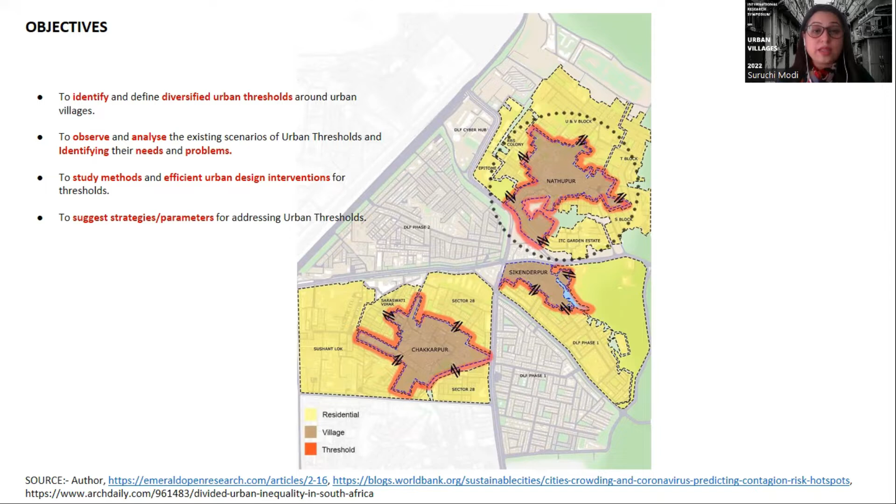Therefore, the research began with a set of objectives: to identify and define diverse urban thresholds around the villages, to observe and analyze the existing scenarios of these thresholds and identifying their needs and problems, to study methods and efficient urban design interventions for these thresholds, and to therefore suggest strategies for addressing them.

The paper analyzes the construct of urban villages as opposed to the city growing around it. Villages in Delhi NCR like Nathupur, Chora Sadatpur, and others are the cases in consideration. It traces their evolution from inception to the present coexistence with the urban fabric around it and explains factors responsible for its unique development trajectory.

Their threshold spaces are considered as opportunities of intervention, hence they're examined in further detail, and solutions based out of integrated governance, spatial integration, and environmental sustainability are considered, again, stemming out of the local community-based needs and aspirations like having schools, sports facilities, public libraries, planned open spaces for cultural and everyday activities, amongst others.

These form the program brief, helping in a smooth transition of the urban villages from being enclaves to integrated nodes within the city. Therefore, having studied threshold spaces, the research began with classifying them in the following manner.

The first one being open spaces, which are made up of parks, squares, waterfronts, green belts, roads, and streets, where people could use these areas to exchange information, strengthen interpersonal ties, and lead to environmental and social cohesion.

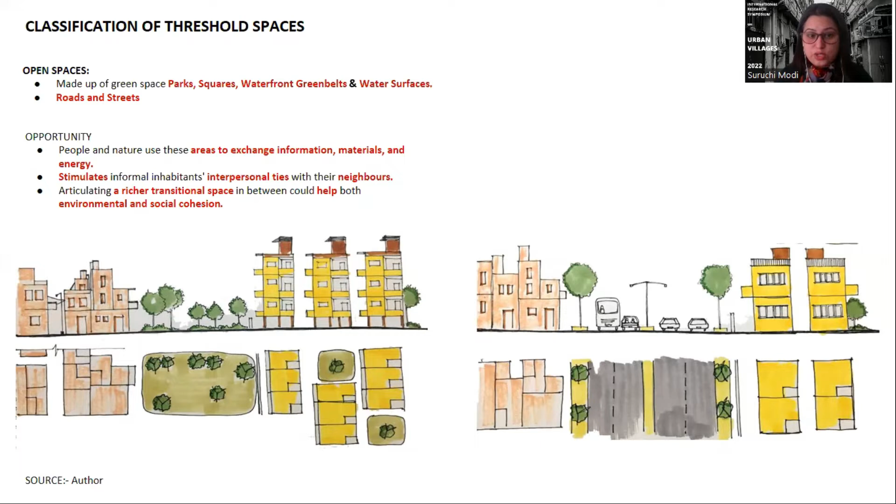As voids or extra spaces in the center of the informal settlement and the structures surrounding it, which are primarily being used for waste disposal, resulting in antisocial behavior. And then the overall morphology altogether, where the relationships between spatial structures, functional constellations, access networks, and emergent urbanity is seen at various scales.

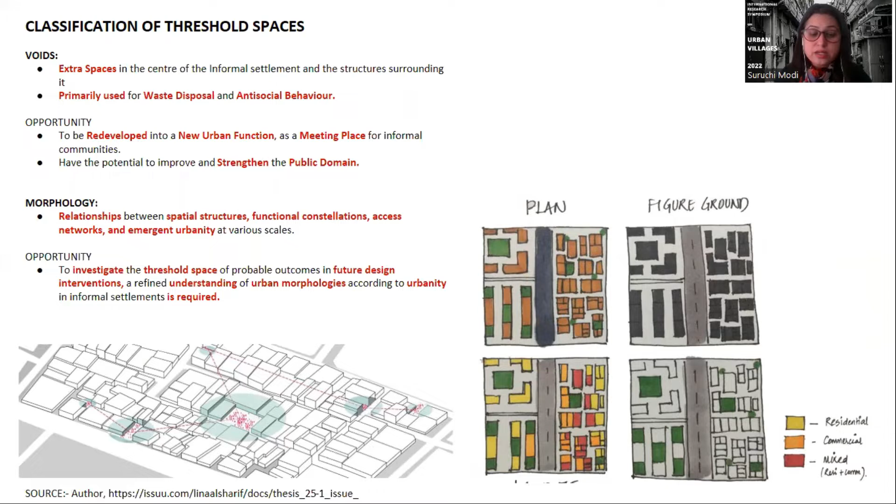Now, taking a deeper look into these through the cases we studied, I would like to pass on the presentation to Anson.

Thank you, Suruchi ma'am. Coming up to our case studies. Our first case study is of Lado Sarai, a project done by DUAC. The space was getting highly congested due to increase in population and being secluded from its precinct and from the city.

Key elements from the case studies that we could gather were they strengthened the structural network of the village and tried to create a segregation between vehicular and pedestrian movement for a smooth and safe mobility network of the village with its precinct, so that they could be a through and through connection of the village.

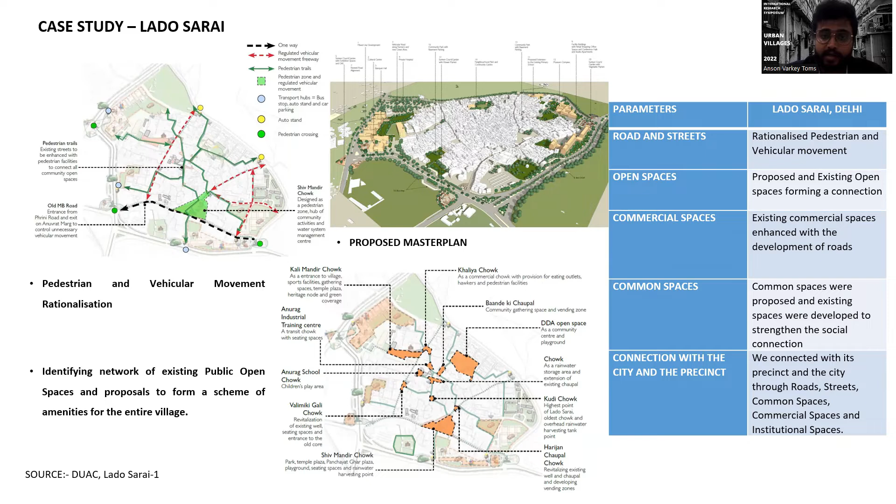They proposed activities and commercial buildings which are highly interdependent and public in nature, such as museums, parks, markets, and hospitals. Coming to our next case study is of Parque Royal, Rio de Janeiro.

So the place was near a water body and it was highly unsafe, unhygienic for people around it due to the detachment, and also the unattended public spaces inside the villages.

Key elements from these case studies were they developed a network system in such a manner that people could easily move inside the village and enjoy the water body, the edge of the water body.

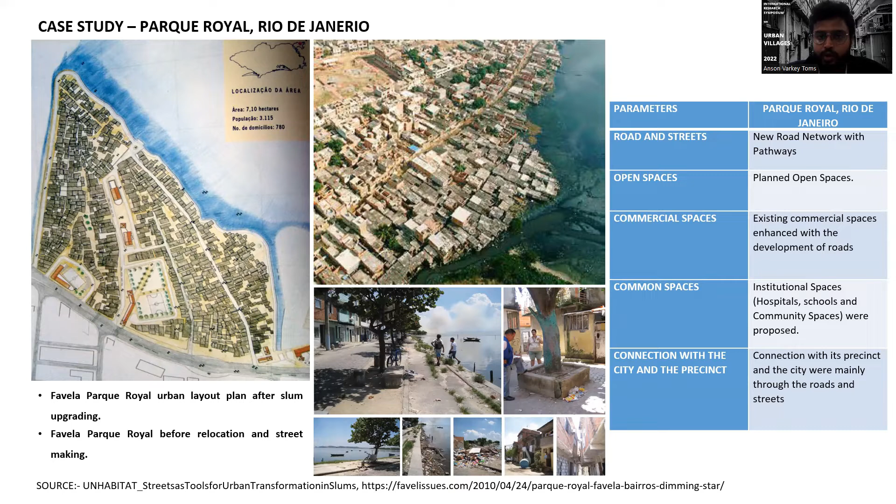They tried to redesign the existing social spaces, which had a great potential, so that people could actually experience a good, lively experience through the village till the water body.

Our third case study is of Medellin, Colombia. In this case, the village was segregated and secluded from the city in such a manner that it took a lot of time from village to reach the city and vice versa, even though they were highly interdependent on each other.

So they tried to create a network, develop the existing spine of the village and expand it, and propose activities which would generate and increase the local economy of the village, as well as create a smooth connection between the city and the village, allowing an easy interdependent nature throughout the city.

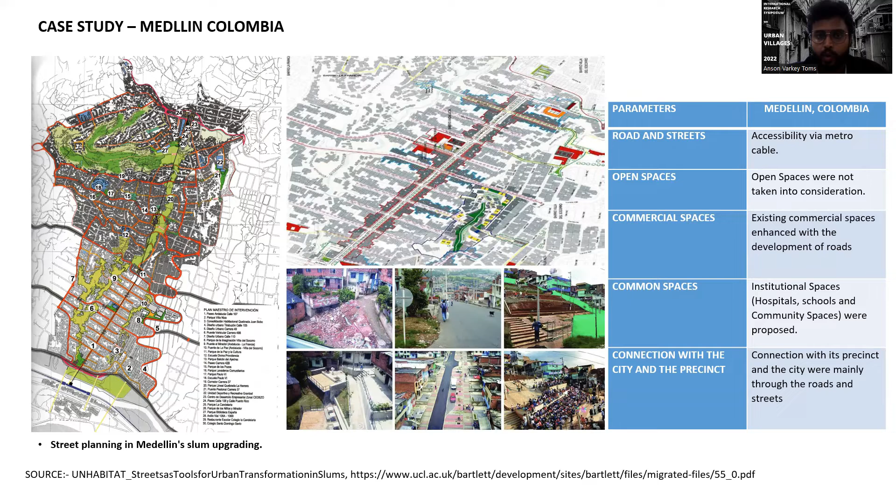So coming to the inferences and conclusions from our paper. Currently these threshold spaces act as a barrier or boundary in the current city's planning system. The potential is high for these threshold spaces, which can generate innovative, socially sensitive, and adaptable solutions. These are currently untapped. Urban development programs should focus on these threshold links.

Isolation from the city's network is one of the major reasons these urban villages don't get recognized, and they slowly get secluded from the city's development. So the potential development is by creating an intervention in the threshold.

First, the development of thresholds tends to tie the urban village with its precinct. Opening of roads and incorporating public spaces would upgrade and provide an interdependent environment, creating a circle so interrelated with each other, blending the space with a smooth transition from one space to another.

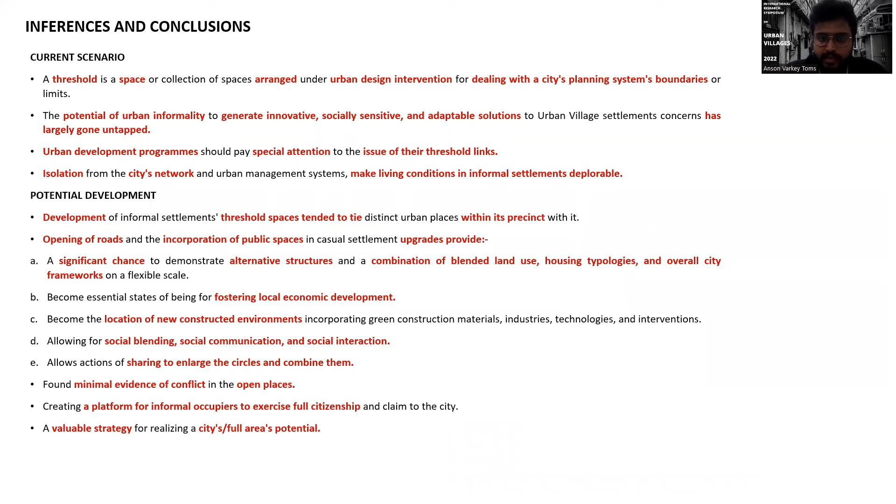Right now, the development that happens is around the village, and the village gets secluded. The activities inside and outside the village are not interrelated. By creating the threshold space in such a manner, we would enable the village to get connected with its surroundings.

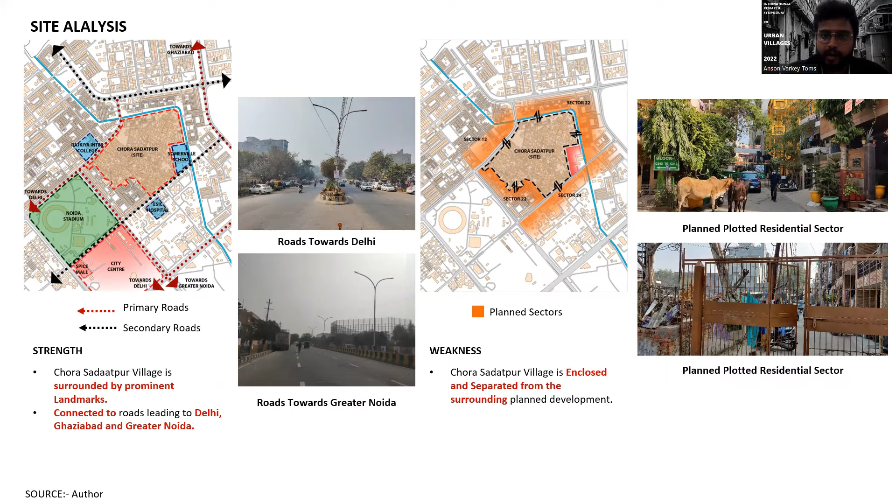All the development throughout the years happened, but the village, which was the initial part of all the development, remained untouched. Although it had many opportunities, such as two major edges - the institutional edge and the commercial edge - with the internal spine highly commercial in nature. On the fourth edge, we could see a space which can be converted with great potential.

Right now, it is the Nala, which is creating unhygienic conditions, and all the spaces inside the villages, the voids, are used as dump yards, creating unsafe conditions and promoting illegal activities in these spaces.

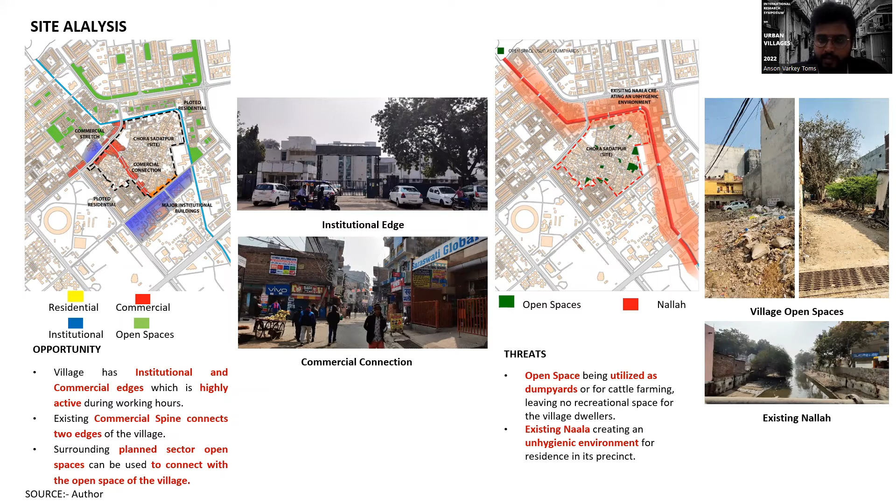With this in mind, our vision was developed to create an interdependent environment of the village and its precinct, for synchronized development of the area. For this, we focused on four objectives: connecting the village structurally, socially, recreationally, and through comprehensive development - all in all, comprehensive connection of the village with its precinct and then with the city.

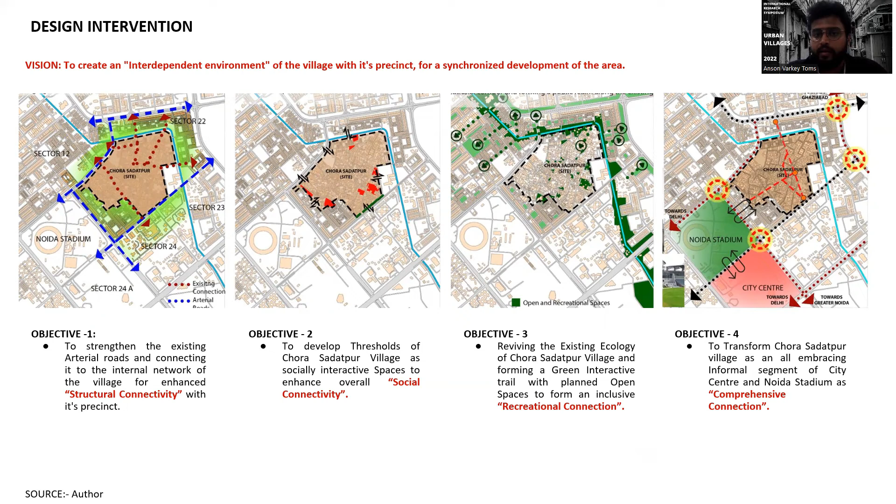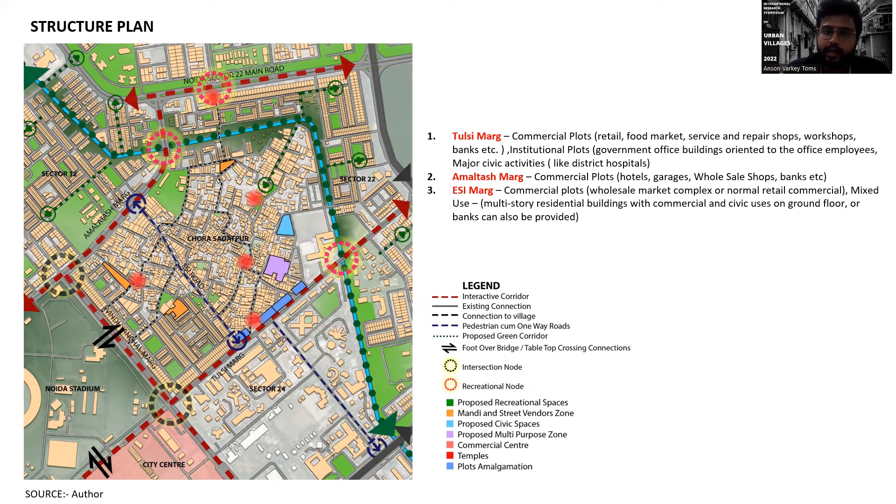For this, we created a structural plan in which we focused on the nodes to create a recreational space, giving a smooth transition from planned spaces to unplanned spaces, and tried to provide social activities in such a manner that people are not only focused on the threshold but also interact with the village in a smooth nature.

As you can see in the master plan, we've proposed activities and developed the edges of the villages in such a manner that people are highly motivated to interact with the village or move around it, and the village does not get secluded from the surrounding development. People get recognized.

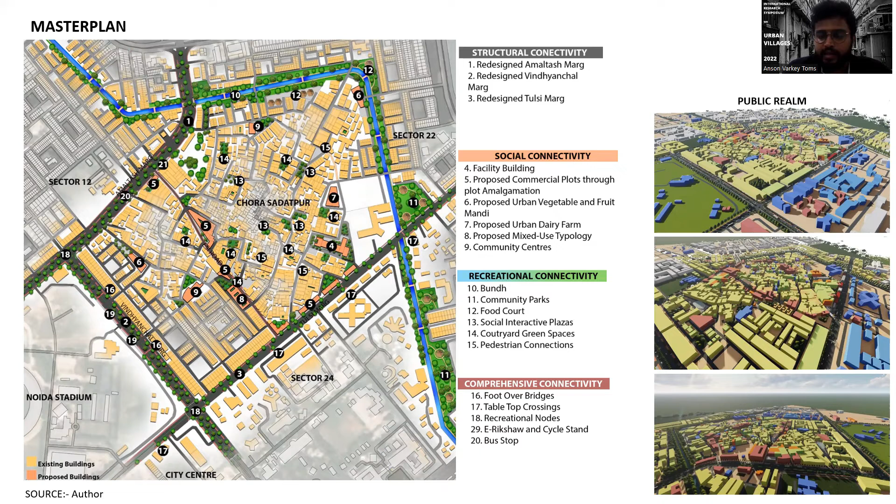It gets revived. Coming to the details, one stretch of the village was highly commercial in nature, so we kept it commercial but gave space for street vendors, so there's an increase in growth in the local economy.

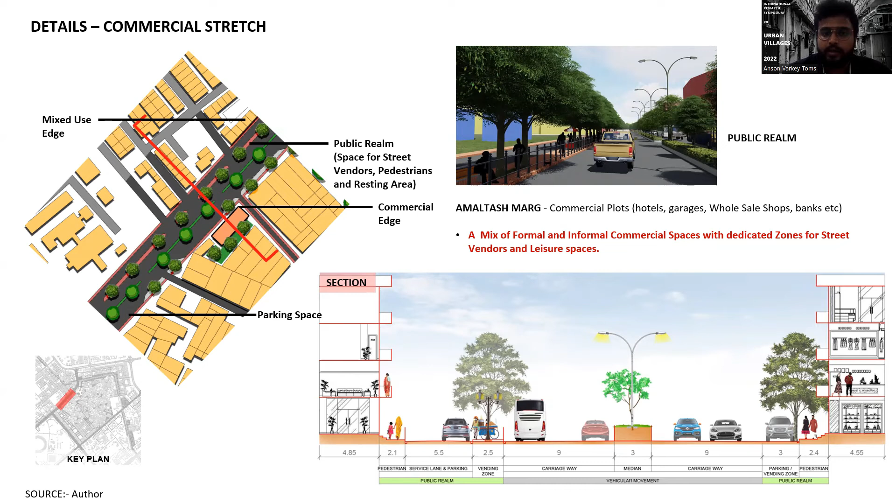Coming to the second edge of the village, which was institutional-cum-commercial, we provided food courts, food joints, and amalgamated plots into bigger plots, so that one edge of the road, which is highly institutional, can have an interdependent or interrelated environment throughout - so the village gets recognized and both edges of the road don't remain untouched.

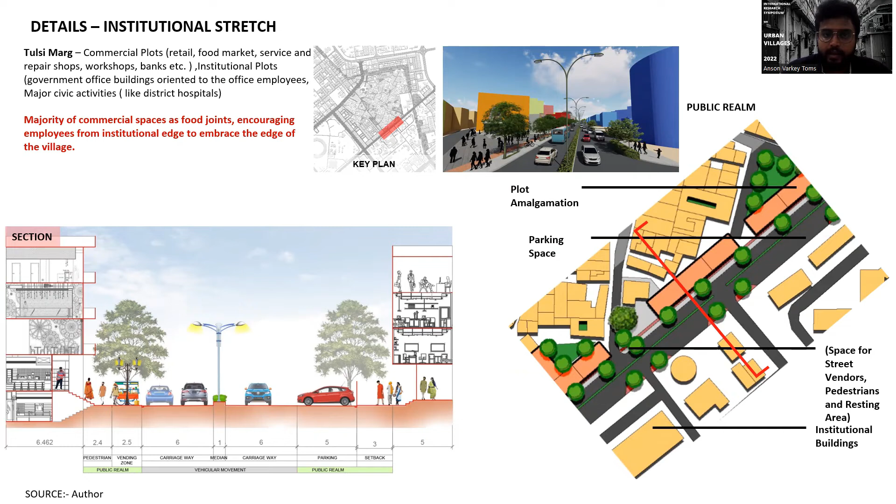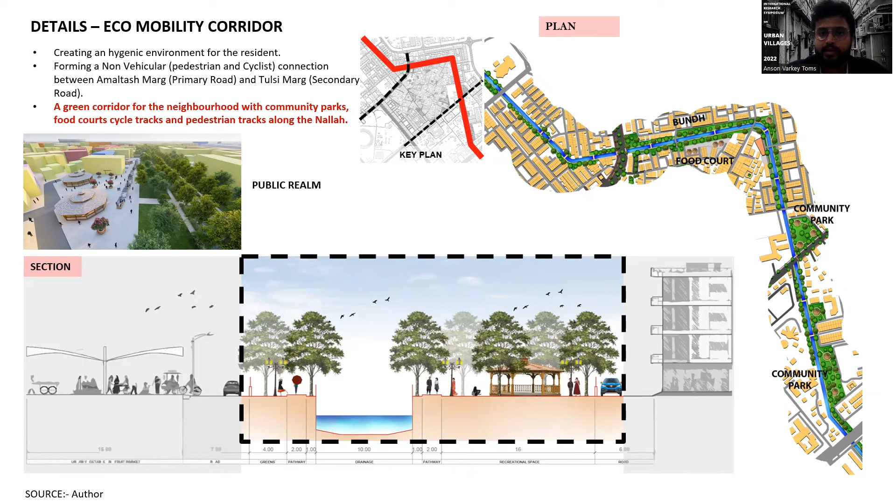It gets linked through eco mobility - a connection between both edges of the village in a non-vehicular environment, keeping it safe for pedestrians and cyclists, and providing recreational activities like food courts, so there's a lively environment throughout the stretch.

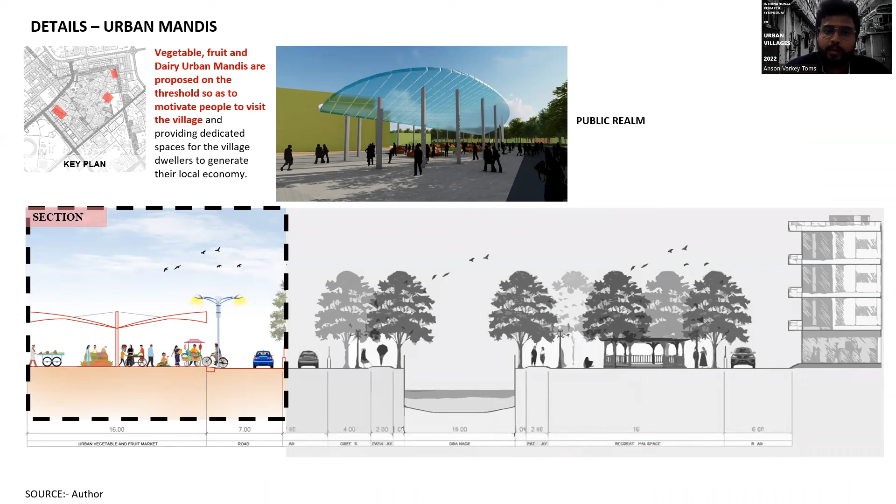Providing urban mandis - basically combining all the mandis where people are currently selling vegetables and fruits on the street - gives them a defined space, and allows people from the planned sectors around it to come and interact with the villagers for their daily needs.

Now coming to the last part of our presentation, the phase-wise development of the whole project. In the first phase, developing the primary roads of the urban village, capturing three edges of the village. Focusing on the fourth edge, we'll develop the recreational part - developing the urban village both structurally and recreationally.

Coming to the third part, connecting this threshold with the internal structure of the village, and proposing activities at such intervals that there are no unattended spaces inside the village, so people feel safe and comfortable moving around, and there is a smooth blend between the planned and unplanned space, and the village gets recognized.

So in future development, villages are also considered as a part of development. Thank you, everyone.